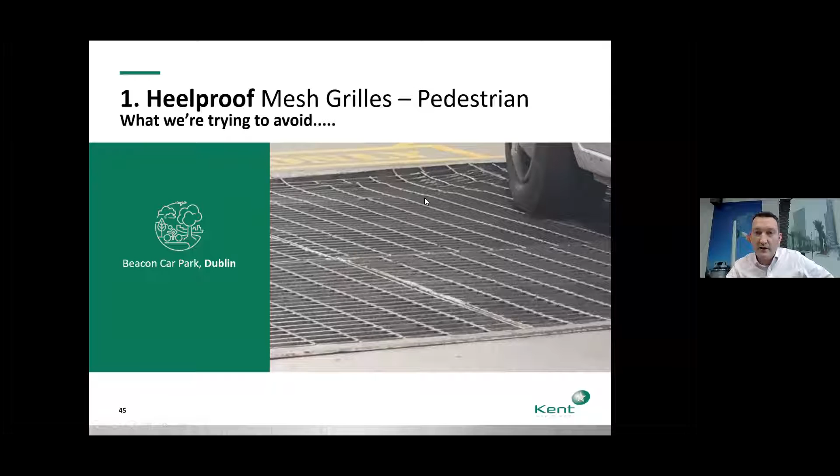It's a lot lower cost than the gratings we're going to describe to you now in a few minutes. But you can see here, the wheel of the car is probably churning up the gratings a bit, so as well as the downward force, you're getting that sideward force too. And look at the gaps here.

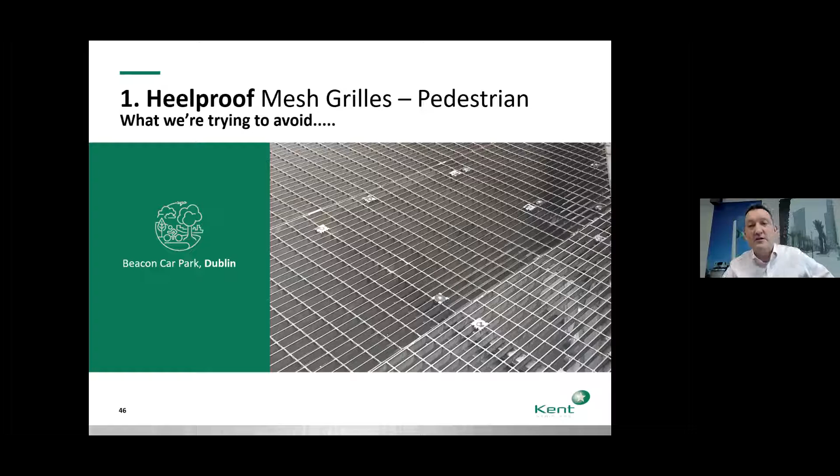Sinead, you mentioned to me the diameter of the heels she uses very often, but I certainly think her heels would go down through these. Even fairly flat, not so elaborate stiletto heels would go through these, a lot of heels will. And look at these ugly lockdown points on them. That's fine in an underground car park, but this was the standard strong grating used to ventilate underground chambers.

Now when we do these projects, some of the consulting engineers and architects end the meeting with, can you make sure you're in compliance with all the relevant standards to do with being heel proof? The truth is, they don't know this, but the standards aren't written very well. There's not really a standard written about heel proof compliance.

So we're going to show you an extract from the American Disability Act. What the Americans say is, when you have an opening on the street no greater than half an inch, that's 13 millimeters, it must not be more than 13 millimeters in one direction. And what they say then is that a heel-proof grate, one with openings of 1/4 to 5/16 of an inch, so 6 to 8 millimeters, can be considered American Disability Act compliant because the size of the opening is less than half an inch. So what they're really saying is 6 or 8 mil is below 13 mil.

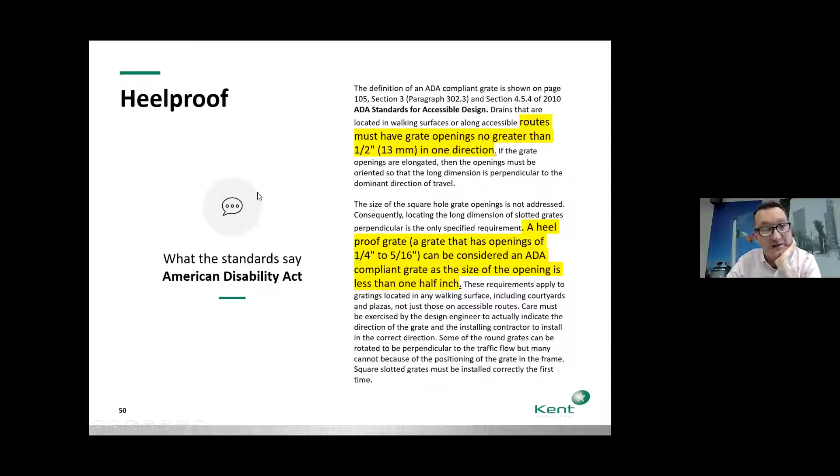And then in Europe we have the European norm EN 1433. What they say is when you have slots, for example we make slot drainage, when that slot opening on the road is from 8 to 18 millimeters - for example our slot drain gaps are about 10 millimeters opening on the street - when you have a slot drain below 18 millimeters opening, you don't have to break up that open slot, you can continue it for hundreds of meters if you want.

And what they say is if your gap is between 18 and 25 millimeters, you have to break it up every 170 mil. So if you think of where I grew up in Leixlip, in a housing estate you've got the footpaths from concrete and then you've got the road from tarmac.

On the tarmac road, there's those kind of curb drains, the little dish-shaped drains, and they'd have a gap of about 25 mil in the hinged cast iron covers. But you'll see the gaps on those would never extend more than 170 mil. So they're being in compliance with EN 1433. But you couldn't continue them for hundreds of meters with that big opening, okay?

So generally, what you take from that is heel-proof is between 6 and 10 millimeters. That's what us and our competitors in the industry would take to be heel-proof. We'd probably consider 6 to be high-heel proof and 10 or 12 to be heel-proof. So for high heel stilettos, we'd make them with a 6 millimeter opening.

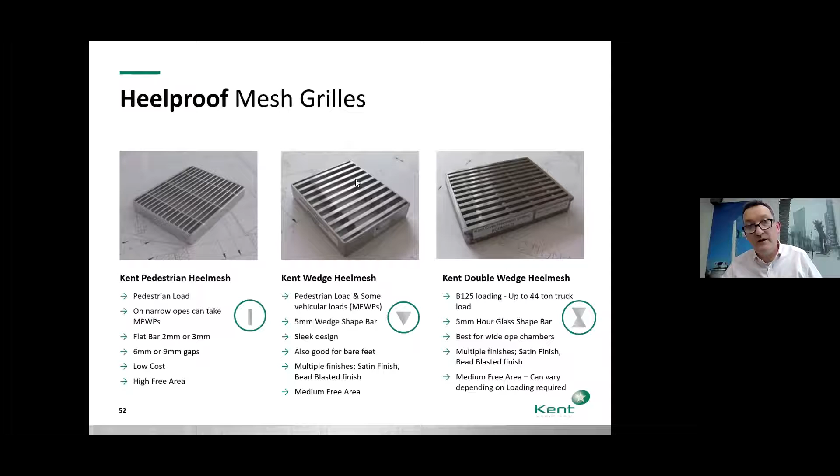So what we're trying to do is get these things to disappear. They almost disappear here, they almost disappear here, they're visible here - those are the load bearing bars.

Now, remember I showed you those ugly lockdown points on those wide electroforged gratings - there was a lot of space there to hide those lockdown points. I don't know why they didn't do it, but the industry standard is to do it like that, and it's a lower cost product. But when you got a prestigious project, we can hide the lockdown points in between the bars and keep an Allen head fixing inside in a cage so it won't fall out.

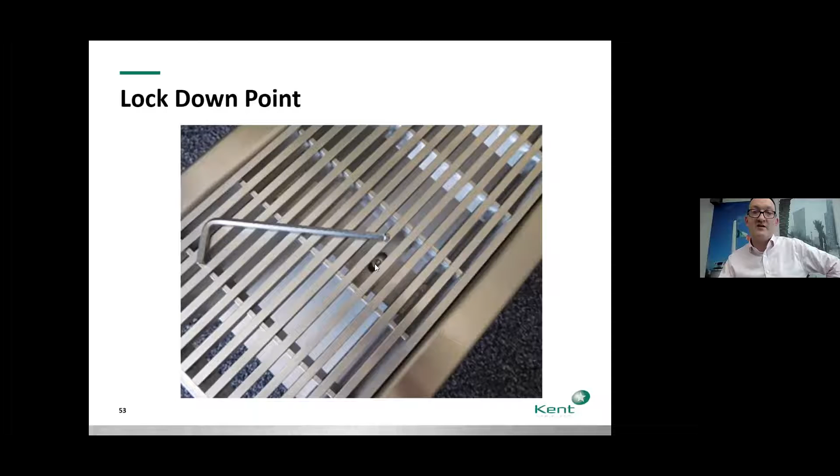So then you can have a run of drainage here - a 150 mil wide drainage, the pedestrian heel mesh, the lower cost one I showed you at the start - running along there with no visible lockdown points in it.

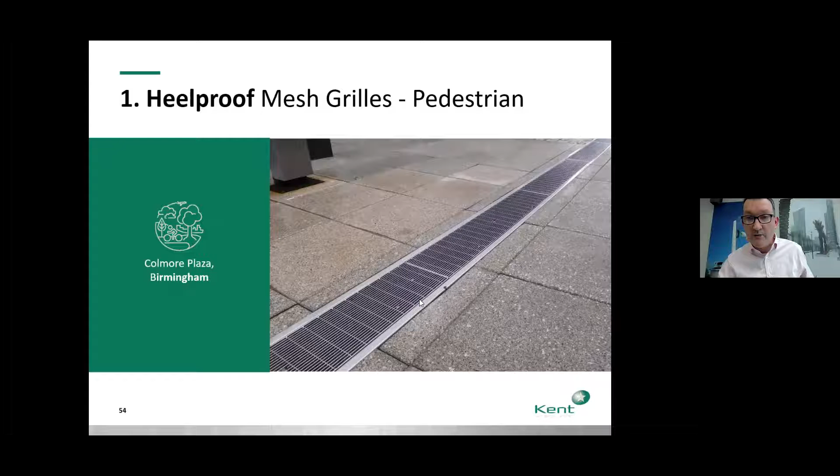So that's Colmore Plaza in Birmingham, heel proof, 6 mil gaps. And there it is in Dublin Airport T2 on the air bridge, taking you out from the airport to the car park. What's interesting now, once I've pointed this out to you, you'll start noticing these when you use the airport.

But then when you go to T1 and look at what was done all those years ago, it's quite ugly - you probably would have never noticed it before, but I suppose Dublin Airport T2 was a gilt-edged project at the time, quite a fine project when it was being designed. So this is fine here on a 250 mil wide area restricted to pedestrian activity.

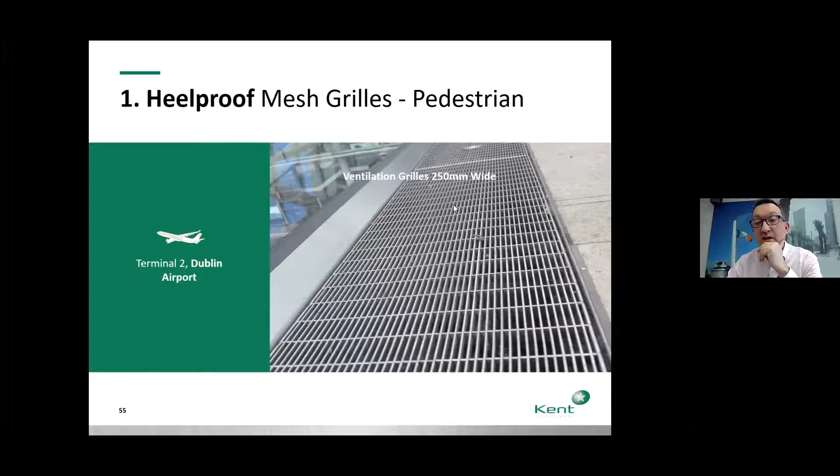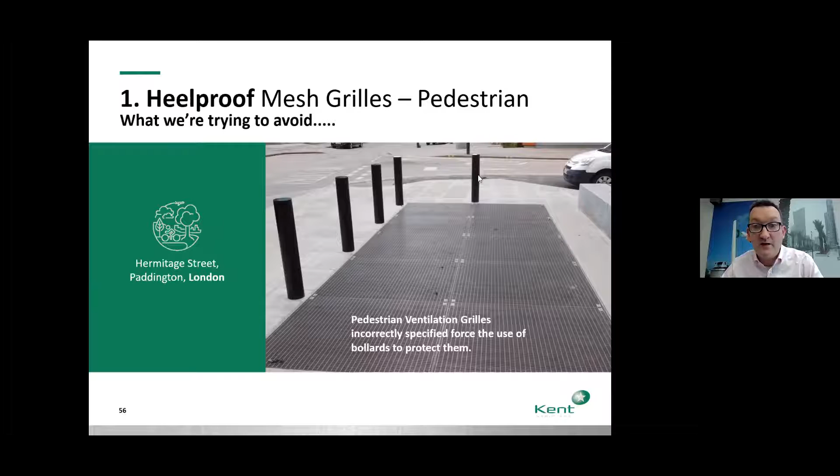So bollards should really be around the perimeter of the footpath if you need them to stop them getting up on the footpath. But visually a lot of landscape architects would not like to see that. So that's what we're trying to avoid.

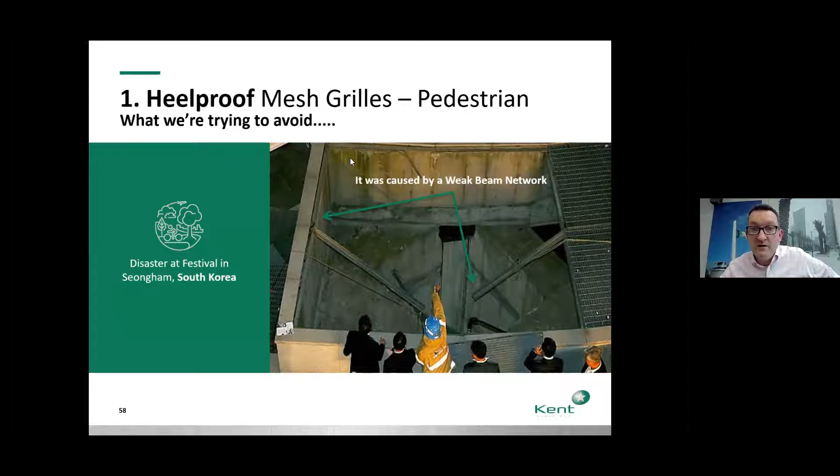So now what happened? Well, first of all, you can see there's a weak beam network here. There's a beam going from left to right here, but there's no evidence of beam pockets there. There should be a lattice of beams along here, where you might have a whole series of grills, maybe 1 meter by 1 meter, all supported by beams with one majorly strong beam going across from left to right, then a series of smaller beams going from top to bottom.

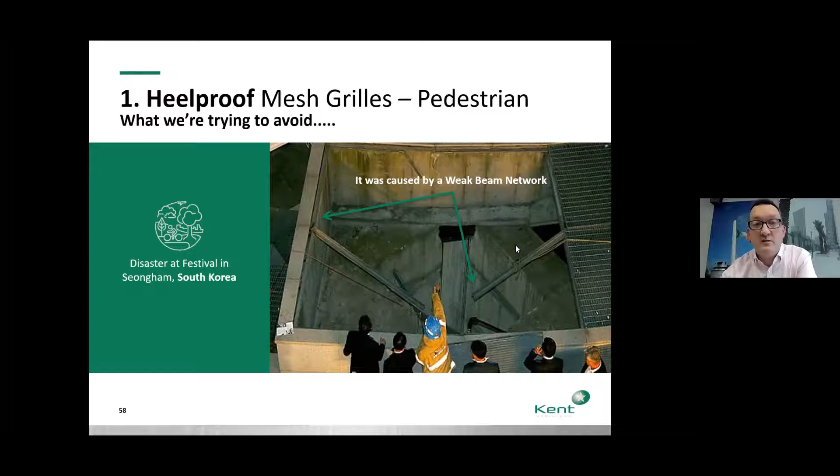Now why did it happen? Also because nothing can drive here. It's a raised area, but not raised high enough to prevent people climbing on it. This is like a plaza area, and there was a concert going on here, so there was entertainment in the plaza. There was about 30 kids up here jumping up and down, a concentrated pedestrian load. No vehicle got on here, but the pedestrians were up there, jumping up and down, messing as teenagers would do with music. And that's it. They fell through the structure down through the shaft, and 16 were killed.

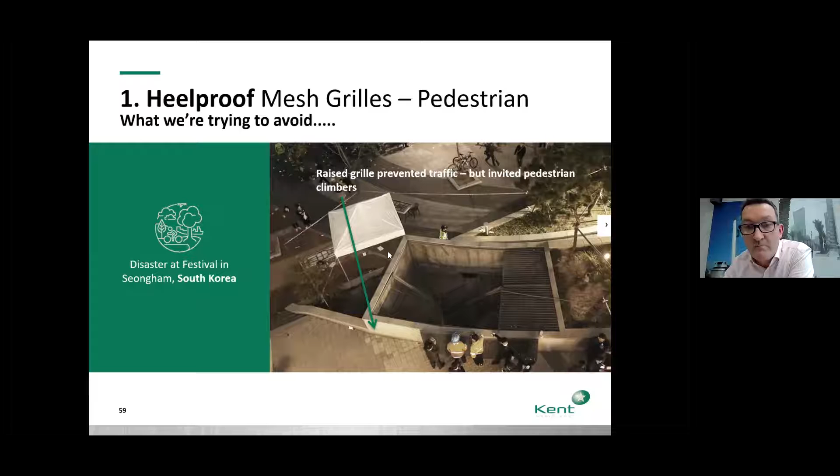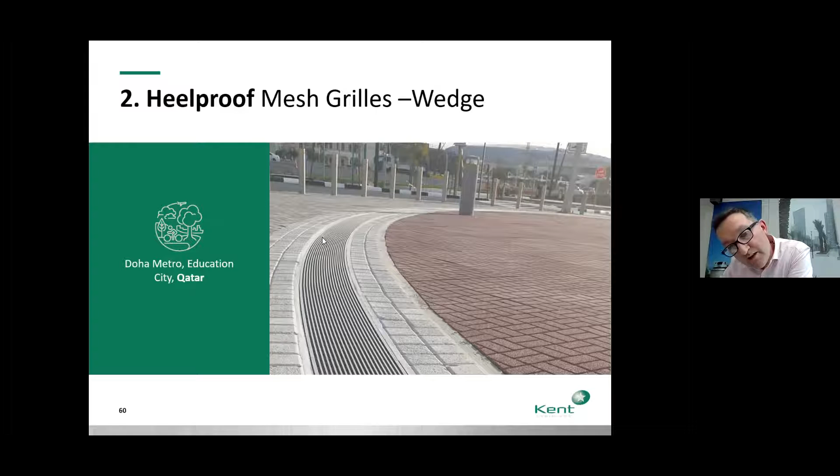We actually did all the bollards around this project as well. It's one of the railway stations on the Metro of Doha. So there it is, that wedge wire - aesthetically it's probably the best we have, but it's only good for those 150 mil wide openings. There it is again around another Metro station. You can kind of just about see the load bearing bars going across there, but they do tend to disappear.

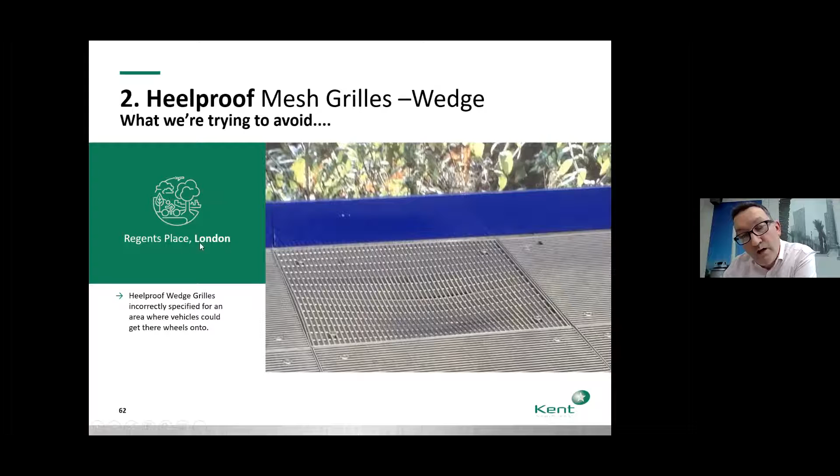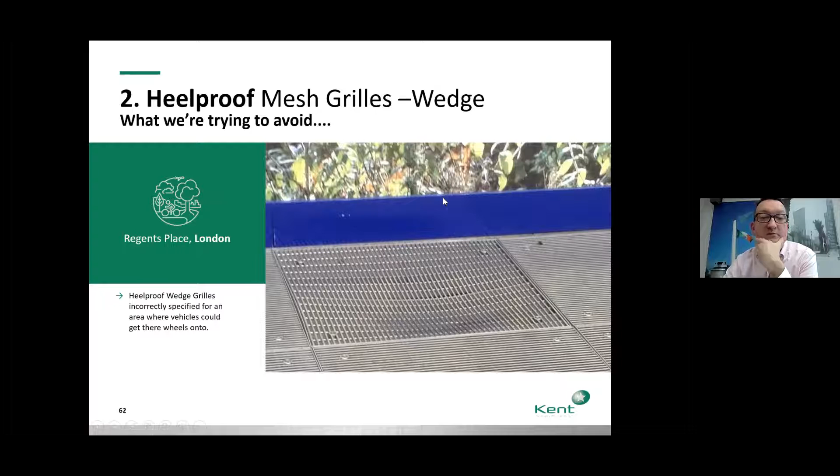And then that wedge wire structure, when it's put in the wrong place - this is an error, as you can tell by the lockdown points, we don't do lockdown points like that - we were invited over to a project where things had gone wrong in Regent's Place in London, and we could see areas there. The grilles were buckling, and we looked at it and just said the wrong product was in the wrong place here. Fine for pure pedestrian activity, but occasionally there'll be somebody dealing with those plants and putting equipment on these grills.

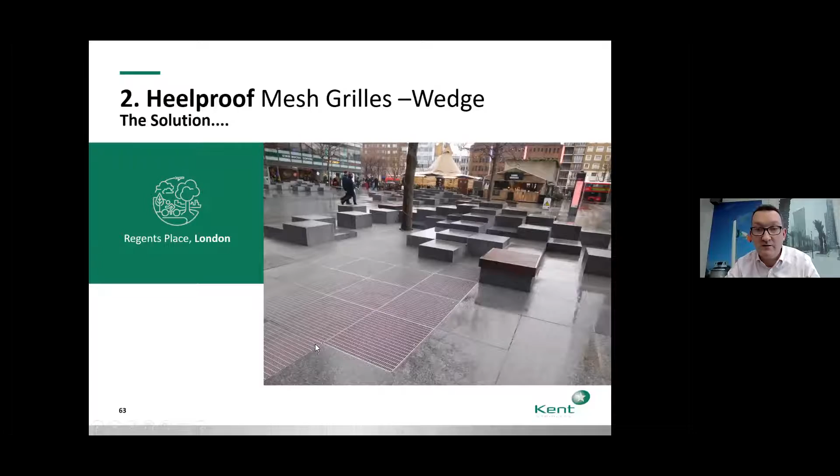But a whole series of, I think there are 800 by 800 grills, supported by a beam network. There's an underground car park below here. And then kind of a nice seated area here, granite stone. This is actually nicknamed the Giant's Causeway, mimicking the Giant's Causeway up in Antrim. So that's down at the bottom of Regent's Place. There's a tower just there where the Starbucks and Pret a Manger is.

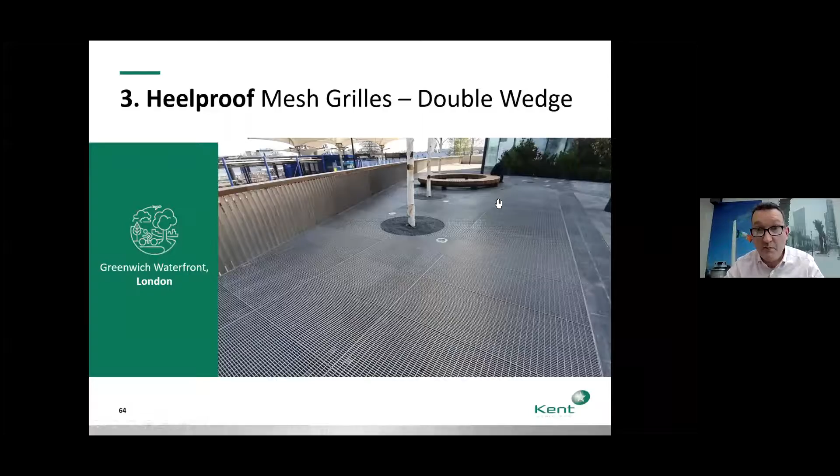Okay, look at this opening here, a massive opening, we're looking at 30 meters by 8 meters or something like that. We've got a lattice of beams underneath this, and there's an underground car park underneath that as well.

All heel-proof, big area, but that can take traffic loading as well. Now look, our business also makes tree grills and balustrade, that's all our balustrade timber top. That seat structure is ours as well. We do all this kind of stuff, but today we're just talking about this section on grills.

Now, how do we make them stronger? For those grills, that double wedge structure I showed you has that double triangular structure running left to right. But we can increase the strength by the load bearing bars running top to bottom here. You can see them here, they're at about 50 millimeter centers. We can bring them into 20 or 25 millimeter centers, so we can double the number of them.

We can also increase the thickness of them, going from 5 to 8 to 10 mil thick. One of the things with these inquiries is an architect or engineer tells us they've got an underground chamber they're trying to ventilate, and they need a certain airflow, which means a certain free area. As you increase the number of bars and the thickness of bars, you're diminishing your free area.

If you imagine a 5 mil bar with a 5 mil gap, you've got 50% free area minus the space taken up by the load bearing bars. In a lot of cases, on a large structure you might have around 42% free area. But by making the bars thicker and putting more of them in, you'll bring your free area down below 40%, to maybe 37 or 38%.

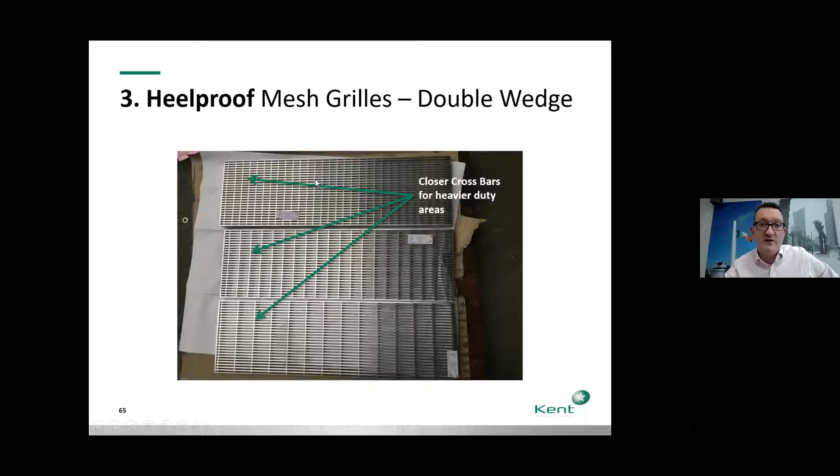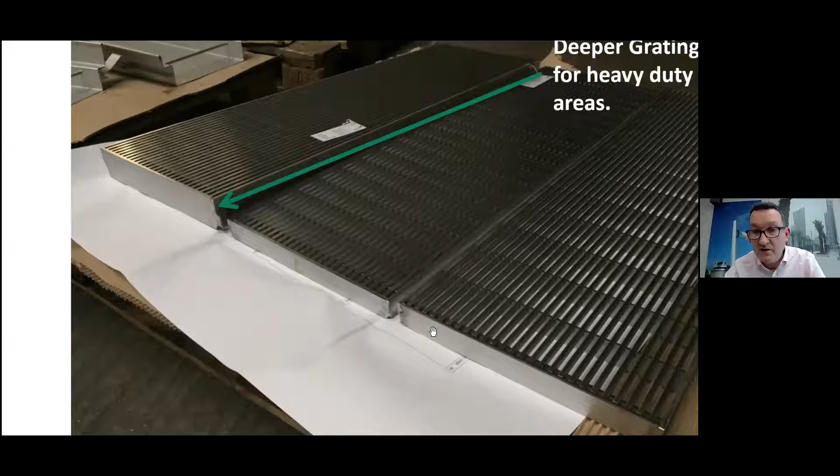Another way of dealing with that, instead of increasing the number and thickness of bars, is to increase the depth of the bars. These are 25 and 30 mil deep, these are 50 mil deep, and we've made these 100 mil deep. Once we make the bars deeper, we don't have to go as thick or put as many in.

So if you've got a project where you're at 50% free area and trying not to diminish that too much below 45%, the way we do it is deepen the bars, giving you a deeper grill. You've got to be able to deal with that with your angle frame all around supporting it, but we're strengthening it without impinging on the free area or reducing the airflow through it.

When you do it right, you can get all the wheels of a heavy goods vehicle on the whole central span of grills. There's a run of grills about 16 meters long by about 4 meters wide, with a beam network going across there.

That's around the corner from the Giant's Causeway, on a road leading up there. I'm going to show you what that looks like today. This year they're keeping the grills in place but doing up the area right beside it. That's what it looks like now - that truck was going over these grills a few minutes ago.

Now they've installed these, which we also manufacture as part of a presentation. These are Corten steel structures with illuminations in them and perforations in the side, they light up at night. Corten steel clad in Cumaru timber with oil. That's the same street.

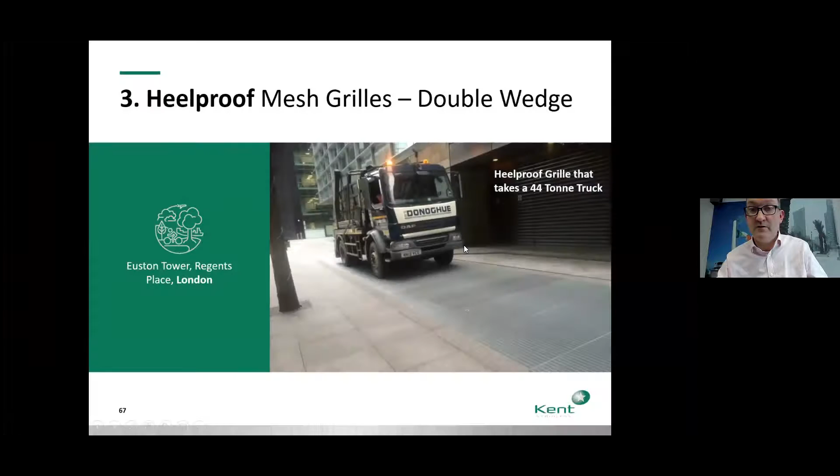We did this 11 years ago, now we've done this one this year. The Giant's Causeway part I told you about is just there - you see where the guy's standing, it's that area just down there behind that glass area.

If the project allows it, if you've got the money in the job and it's a prestigious job and you want it to look fancy, we can play around with the load-bearing bars and the crossbars to create something like a chessboard effect or some kind of pattern. That's kind of nice. That's at the bottom of a project called Shell Tower.

The petroleum people, I think, is it? It's Shell, yeah, the company. Shell Tower in South Bank Place in London.

Okay, and that'll take the wheels of a 44-ton truck on that, as well as save your high heels.

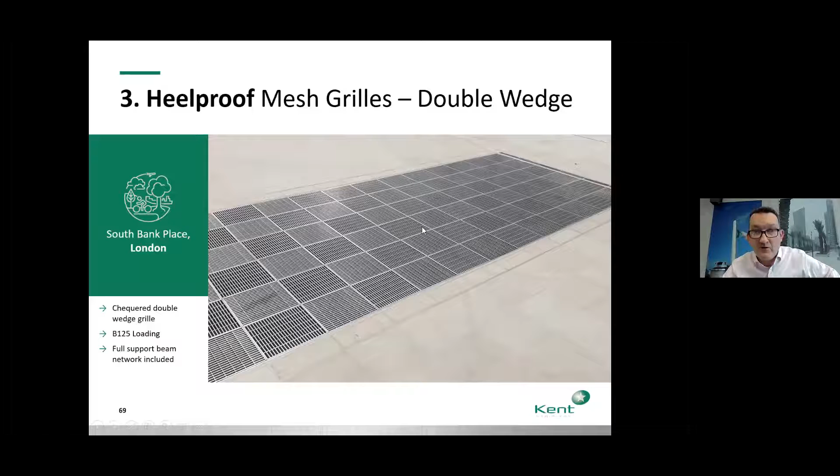Actually, one of the reasons they wanted that crisscross pattern - I forgot to say this, it's a good point - was that if you have the opening of a building here, and you ran all your transverse bars this way, then a wheelchair entering it would have its wheels turn on the bars going all one way. So that's one of the things that got them thinking about this, that you should install your transverse bars perpendicular to the direction of traffic, so that wheelchair wheels cross them in a perpendicular fashion. This was also done for aesthetics, but that's one of the things they wanted to tackle here.

Right, the same kind of structure, double wedge, we do it then on this narrow span, but we do this because every now and then you might get wheels across. This is a fountain area. We make fountains - we're not a fountain company, but we make the stainless steel elements of fountains for a couple of fountain companies in Britain.

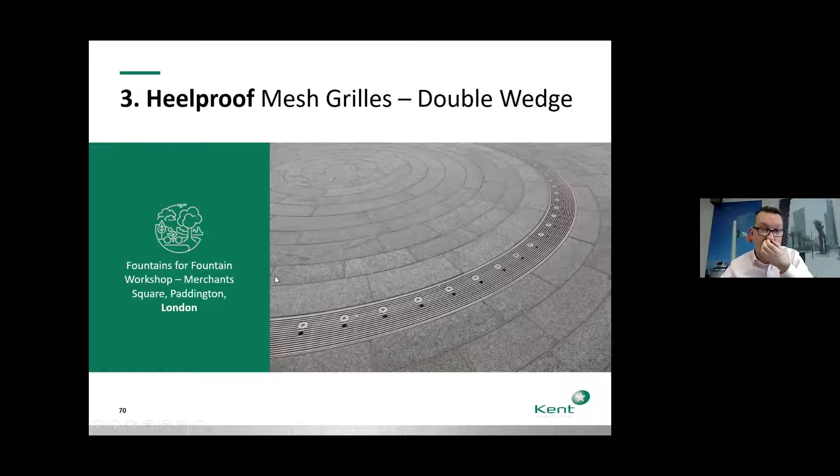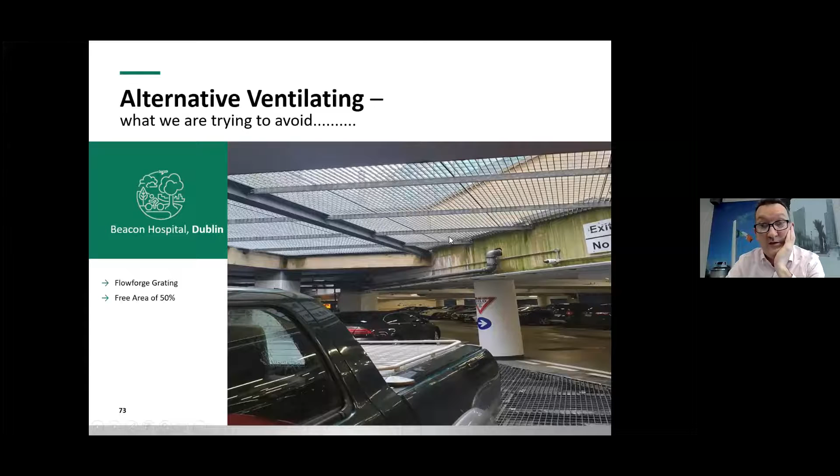Well, the heel-proof grills will stop the cigarettes going down, but they might get wedged in it. But sometimes if you're concerned about that, and you don't want open gratings and you don't want the heel-proof gratings, because dust and little grit can fall down, and even rain - if you didn't want rain getting down, sometimes you might want to move to vertical ventilation instead of horizontal ventilation.

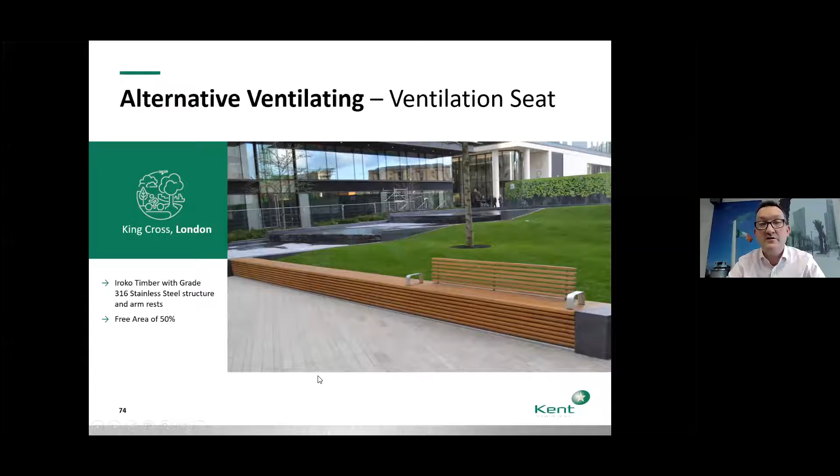So if you had that problem you were trying to address, and had the free area you're trying to ventilate, what we do is build the ventilation into the vertical wall of a structure. In this case, it's a seat. These seats can hinge open, and can contain cavities that hold things like umbrellas or seats.

So there's a ventilated seat we made in King's Cross. It's really just taking the ventilation opening, turning it vertical instead of horizontal, and then disguising it through these louvers that then look like a seat.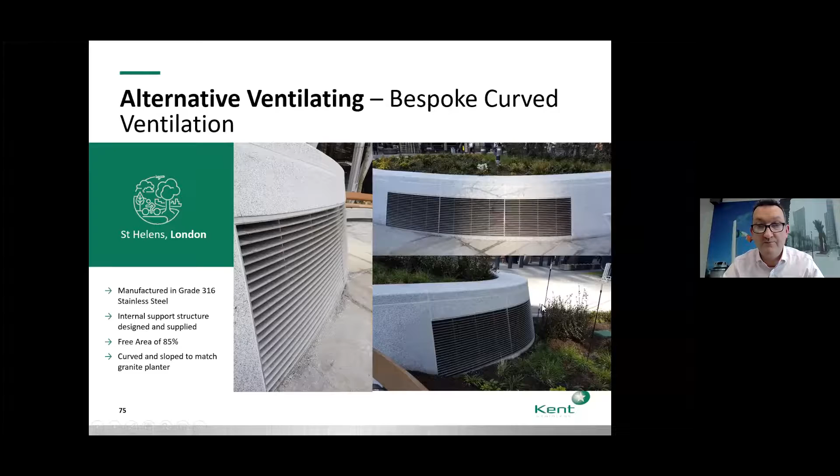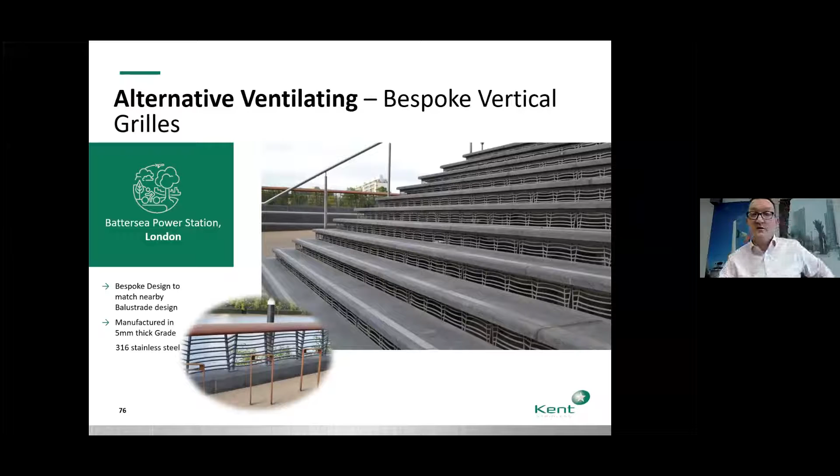That's at St. Helens. And there's vertical ventilation built into the vertical wall of these steps - that's at Battersea power station. It's a kind of strange little pattern built in there, quite high free area, but the pattern is there because, if you look, we didn't do the balustrade nearby, but somebody else did, and they wanted this theme to continue across in the design.

For us it's just a laser-cut pattern - could be squares or circles or whatever. In this case, it's patterns that match the balustrade. There's the balustrade that's nearby.

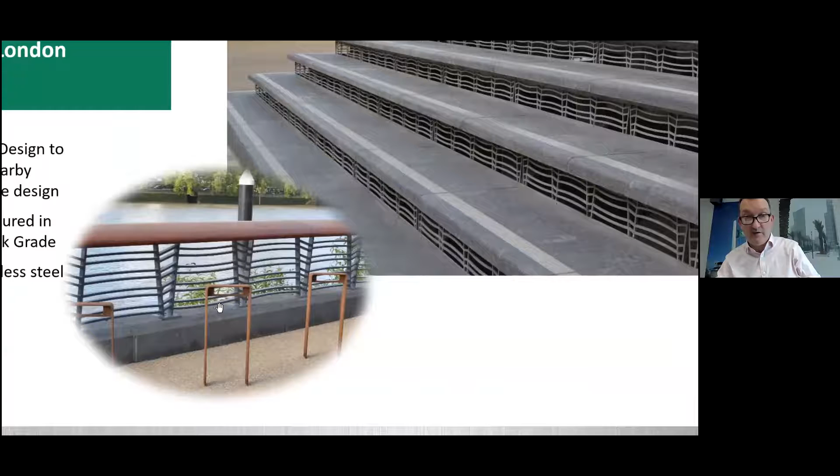We actually did make these Corten steel bike racks as well. And these are ventilated bollards - this was designed for Qatar, where there's a lot of manhole chambers below ground, and in the heat there's a lot of contraction and expansion of the air and gas below in the chambers.

So they want to ventilate some manhole chambers, but they want to keep those chambers watertight yet ventilated. So how that's done is you've got some ventilation points here, but we can keep it watertight by running a secondary tube that's not ventilated.

So let's say this is a 10-inch tube. We've got a 4-inch tube rising up above the top perforation here, and then the airflow comes through the chamber, up through the central tube, the 4-inch tube, out over the top of the 4-inch tube, and then out through the perforations in the 10-inch tube. So it's coming up in that fashion. It creates a ventilated structure that's still watertight.

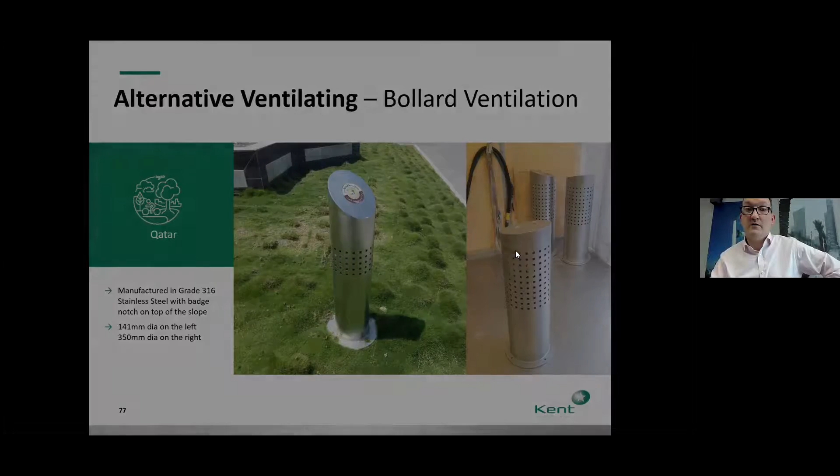Now, I was going to go on and talk about finishes here. I don't think we will, because we spent quite a bit of time talking about the grills. We might just leave it there. Sinead, what do you think? I think I probably took half an hour there where we thought we might be 20, 25 minutes. So I might just finish it up there. I think that'll make more sense, and we'll see if there's any questions and answers. Sinead, does that sound okay? Yeah, that's fine. I mean, we do still have a few more minutes. We could go on for another 10, 15 if you wanted. Well, if my voice takes it, I think it might be quite interesting.

Right, okay, so that's ventilation grills. I told you there's 8 sections in this presentation we give. Another section a lot of people ask us about is stainless steel finishes.

So what happens? Well, first of all, I have a few new slides in here, we'll just deal with them first. What's stainless steel? Stainless steel is typically made up of iron, carbon, chromium, and nickel, and typically the chromium is about 18%, though not always. Now, a lot of people know of a couple of grades of stainless steel, but there's about 200 grades of stainless steel.

Your knives and forks at home are made out of stainless steel. Your sink might be made out of stainless steel. The catalytic converter in your car, or the exhaust, is made out of stainless steel anyway. The 200 grades are split into 4 families: duplex, ferritic, martensitic, and austenitic. The ones we typically use are austenitic; occasionally we use a duplex, but austenitic is typically what we use. Across the world, 70% of stainless used is austenitic.

And then the majority of that 70% is grade 304. You might hear this mentioned, 304 and 316 stainless steel. If you add molybdenum - hard to pronounce, I used to call it molybdenum but it's molybdenum - if you add molybdenum to grade 304 stainless steel, you get grade 316 stainless steel. It adds about 20% to the cost of a finished product, but it increases your corrosion resistance.

So why would you want to increase your corrosion resistance? Because if you're working in a pharmaceutical factory, you might have some highly corrosive chemicals. If you work in a Coca-Cola factory, the sugar concentrate is very corrosive on stainless steel. If you are doing things on the streets in London, in the winter, they're terrified of people slipping, so what do they do? They put down salt on the streets, and salt is corrosive against stainless steel. So all of those things would make you move from grade 304 stainless up to grade 316 stainless steel.

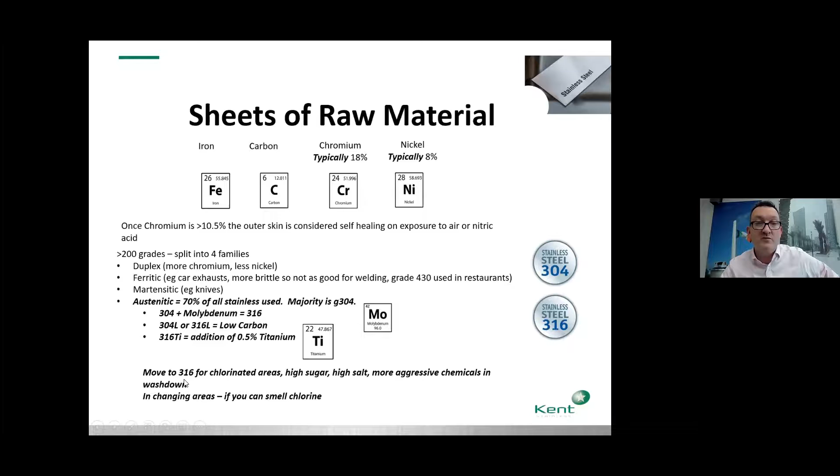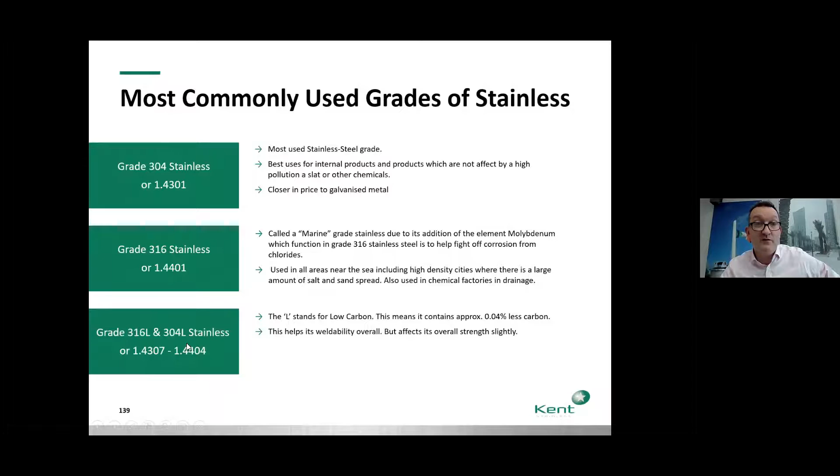I think I've already said this, so I'll skip on. 304 and 316 are very typical terms we use, but they're really the American terms. The European terms are these.

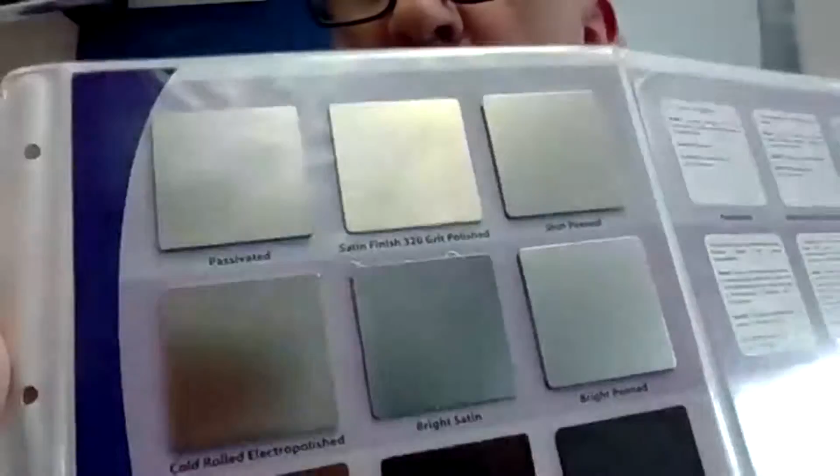So you should be able to see grain going from side to side here on this piece here, okay? And that's done by, like, we buy in these belts of polishing belts, like the 3M company makes them.

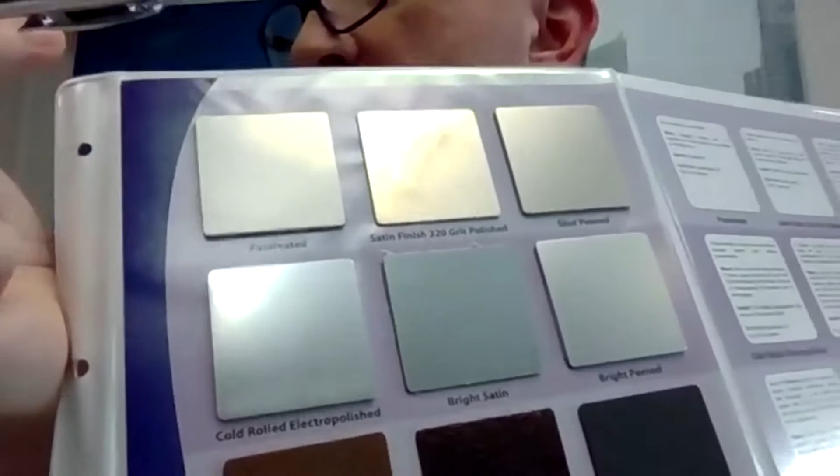It's like sanding your wood at home. You might start with a rough grit and finish off with a fine grit. The same thing happens with stainless steel. You start with a rough grit and finish with a fine grit.

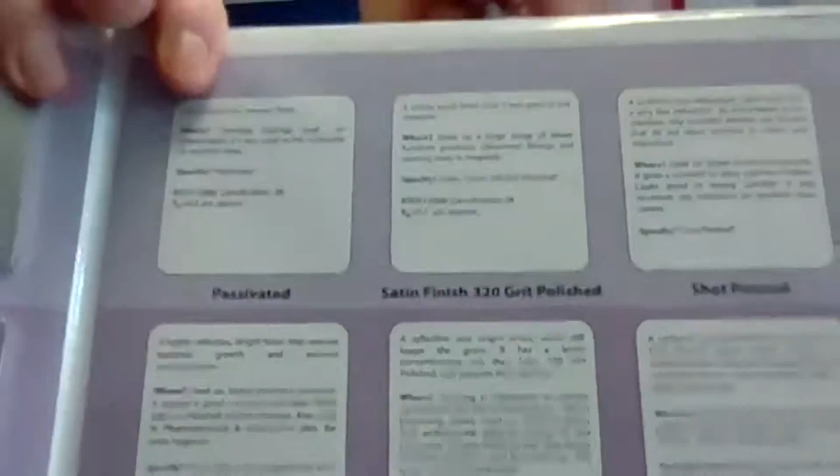Our standard grit is 320 grit. Okay, and if we use 320 grit, let's see, does this... I don't know if that's readable or not, Brendan, is it? No. Okay. No, I don't know if that helps the camera focus or not.

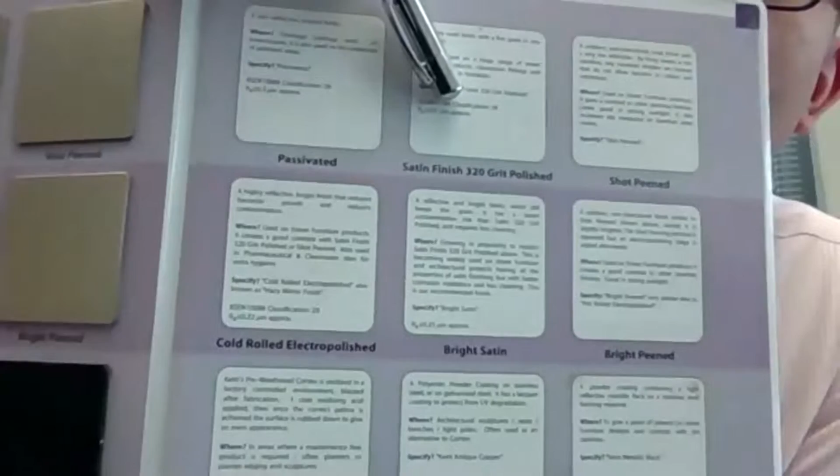But anyway, 0.5 RA is what you're trying to achieve - 0.5 roughness average. Okay, and if you do that, you're in compliance with the European norm 10088 for architectural stainless. So you want a 0.5 RA.

And that means if you zoom in on that polish, you'll see peaks and troughs, mountains and valleys, and you want them to be as smooth as possible. You want the grain to make it pleasing looking. But you want that to be as smooth as possible, and you should be in compliance with EN 10088. You should have a grit.

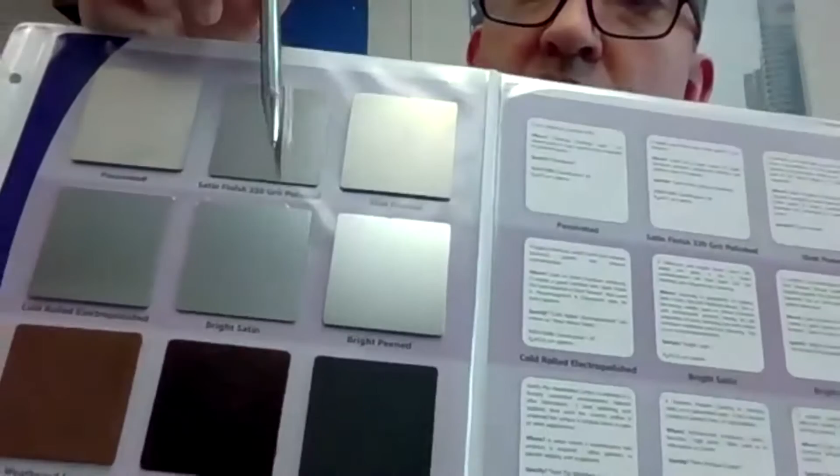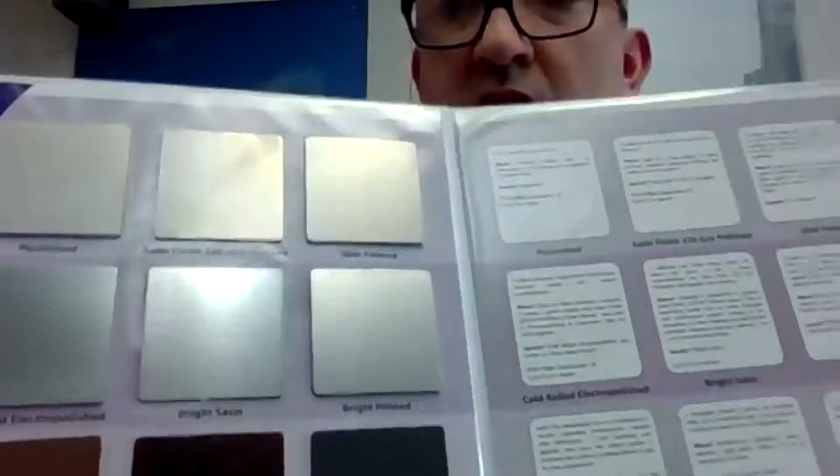So if an architect wrote down polished stainless, that's not good enough. You need to get your grade of stainless right, but more importantly than your grade of stainless is your polish of stainless. Okay, so you can have grade 316 stainless, and you could polish it badly, and then you're going to have problems. I'll show you pictures of those in a second.

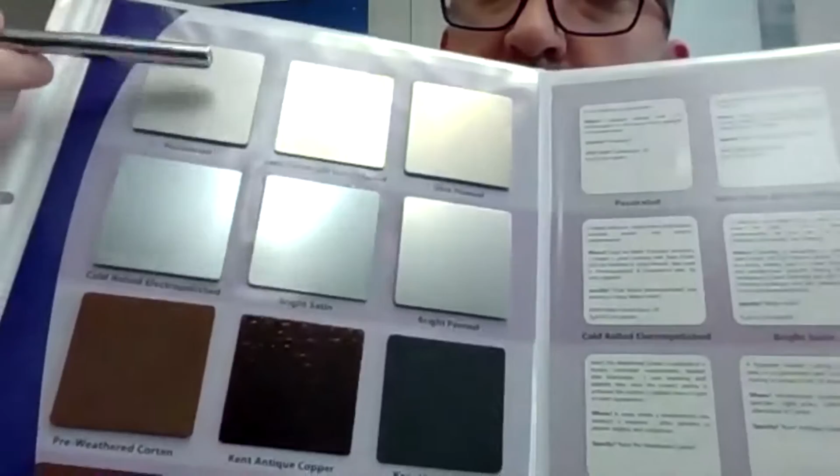And then you can see the pen being reflected here. When we buy in the stainless, well, it looks like this. When we put it in an electropolishing tank, it gives it that kind of hazy mirror finish, okay? So no grain, but you kind of get a reflection of it. And that's great for pharmaceutical projects and that, okay?

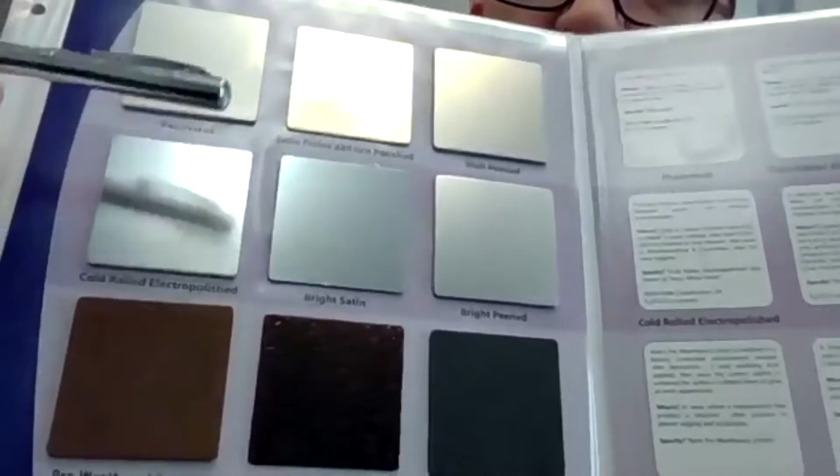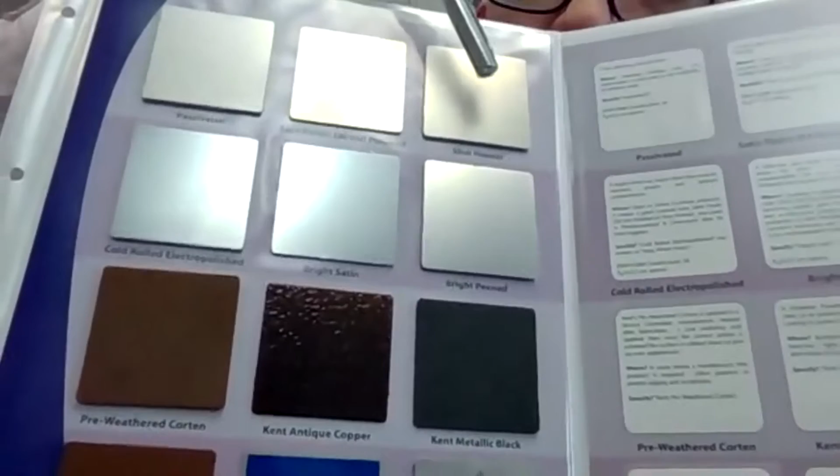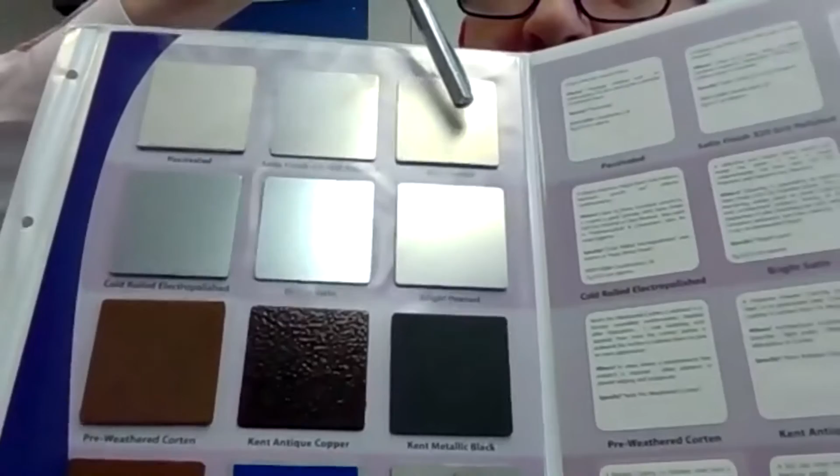But if you look over here, you just see a shadow of the pen and not a reflection. Reflection here, shadow here. We've bead blasted the stainless here. So we've fired beads, tiny beads - I can't remember the micrometer diameter of them - and you fire them at the stainless steel, and you give it that kind of mottled finish.

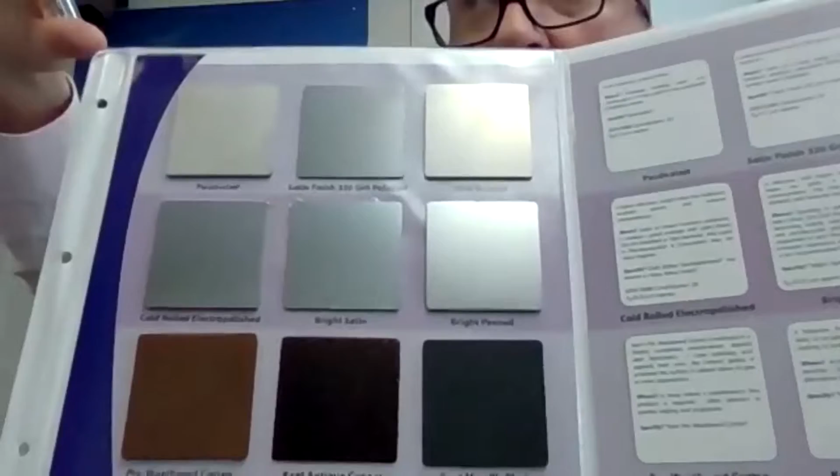And that's good if you had like a planter or a seat and you had a few panels of stainless and they weren't all lined up with each other. Some were going across, some were going up at an angle. Then you might want that grain going across and up at an angle. You could bead blast the whole thing and it'll have a uniform finish.

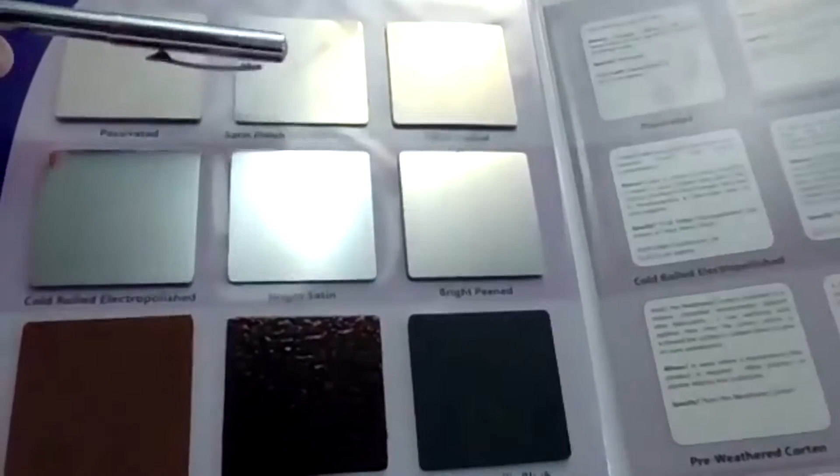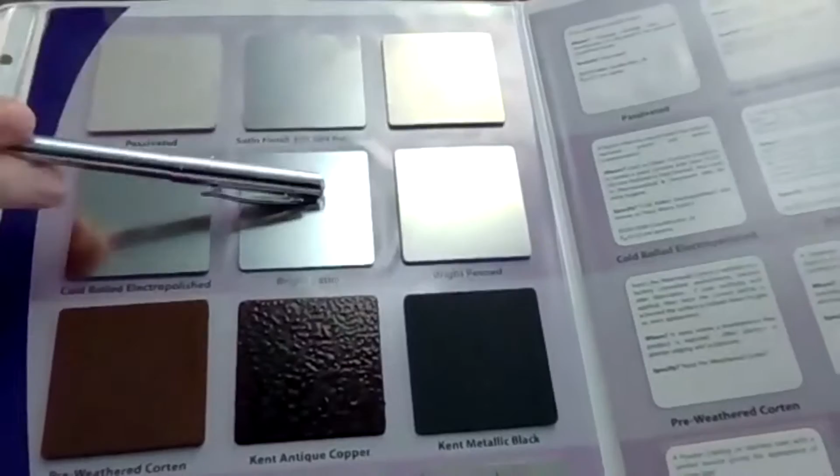And what we like to do is get people to accept it - take the satin finish and then dip it into an electropolishing tank, which removes a slight skin from the stainless steel, much more hygienic and helps the life of the stainless steel. So now we're exceeding the requirements of that European norm, okay? We're going from an RA of 0.5 to about 0.25 approximately, okay?

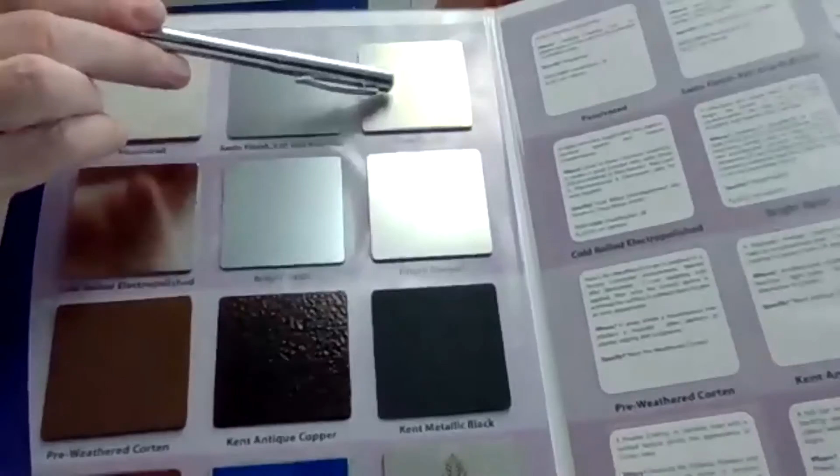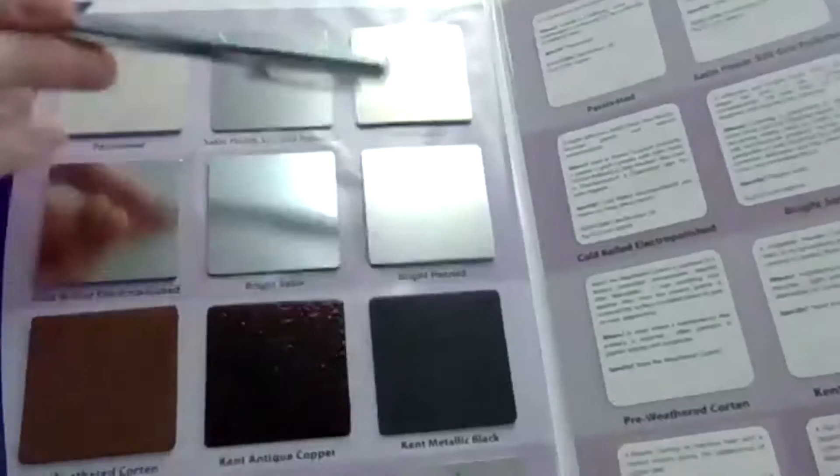And with that bead blast - now bead blast isn't really good for stainless steel, okay? But you can hear how rough it is there, okay? But if you electropolish that bead blast, it helps the life of it. It stops the tarnishing, or it helps stop attracting contaminants.

A few more finishes here. That's 304 stainless steel, powder coated with a kind of metallic black finish. Corten is very popular - there's a piece of Corten steel. It's not stainless, but this is stainless steel coated to make it look like Corten steel.

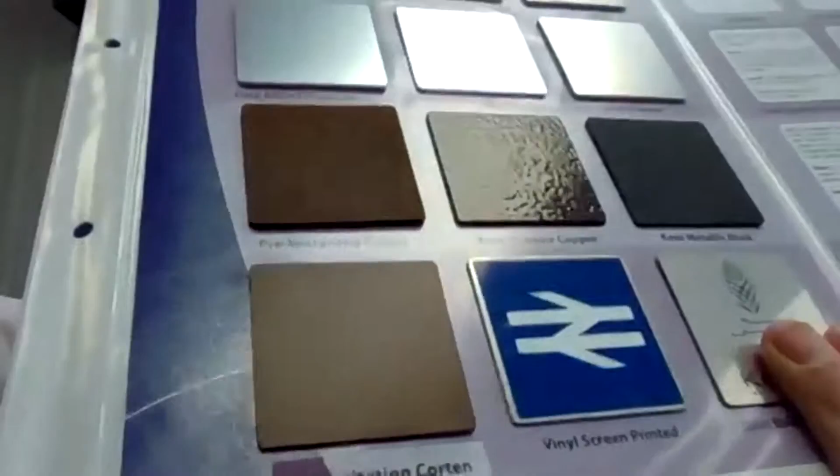Okay, so this is better than if I hand these things around in your office, but okay. Right, now let's share again.

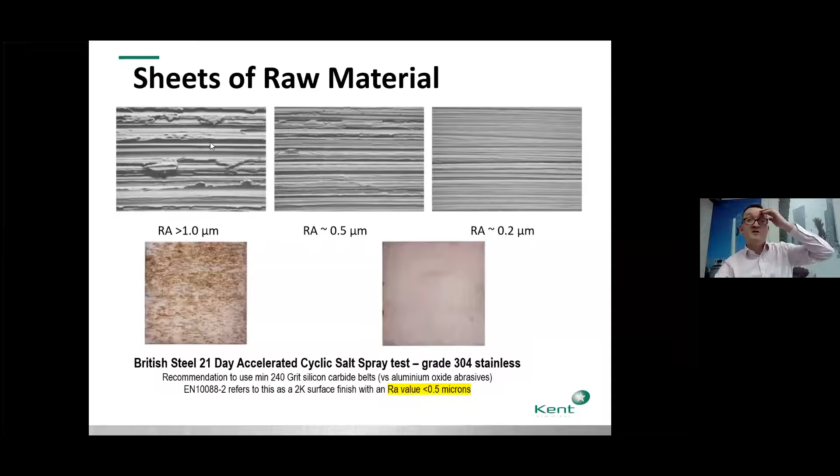Okay, so when you get your microscope and look at that kind of polished finish, an unscrupulous company may polish it and it's going to look fine when it's delivered to site. When you take a microscope to it, it's going to look like this. Now, so what? Do you care if it looks like this, or this, or this?

Remember I showed you electropolishing brings the RA down to about 0.2. It's smoothing out those peaks and troughs, those hills and valleys. 0.5 is what you need to be compliant with the European norm, okay? An RA value, a roughness average value of less than 0.5 microns, in compliance with EN 10088.

This is kind of a test that the British Stainless Steel Association has done, like firing salt water at it for 21 days. Here's what happens to this, and here's what happens to something in between these two.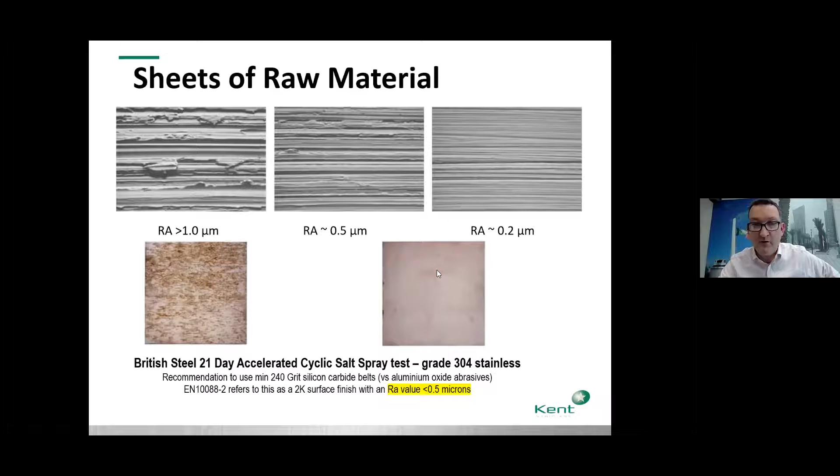When we weld the stainless steel, we can leave it untreated, which we never do. We submerge it in a pickle and passivation tank, which restores the skin of the stainless steel. But some people, if you open up a cabinet or something, they may not passivate their welds. They should passivate their welds. They can brush them, they can grind them, but pickle passivate is what should be done.

This again is that when you spray the salt on it for 21 days, it looks like this.

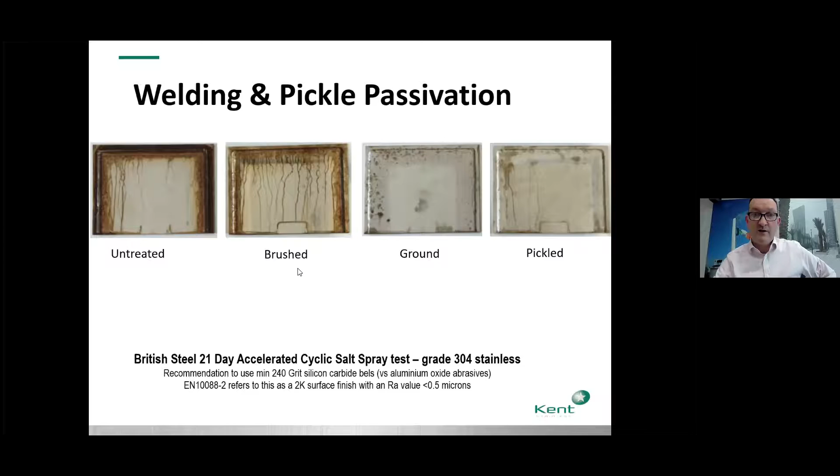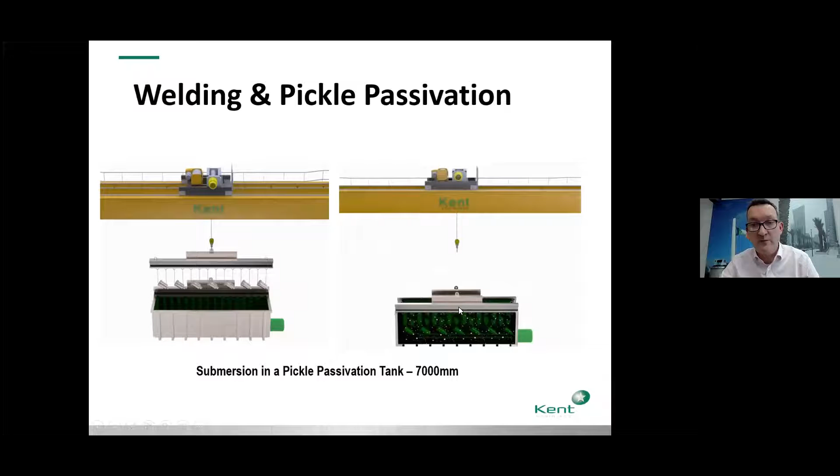So what we do in our factory is we've got an overhead crane, and it drops, for example, here's 7 or 8 drains for a pharmaceutical factory being submerged in pickle and passivation acid. We've got a 7-meter long tank. Submerge them in there and you'll passivate all the welds and restore that protective layer that's on the outside of the stainless steel.

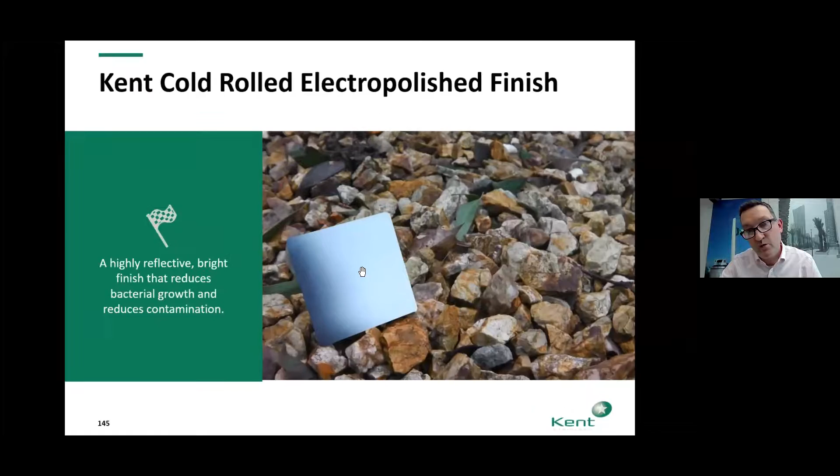So there's a close-up of that 320 grit polish grain going one direction. Here's a close-up of the same thing that's been dipped in the electropolishing tank. You see a slight bit of extra reflection on it. And there's the kind of hazy mirror finish that we like to use in super hygienic applications.

So what can go wrong is if you don't polish it properly. This guy delivered these the same year that we delivered these. He won the job because he was lower cost than us, so we didn't get any of the bollards there. Well, we got some actually—you'll notice them because we have them mechanically fixed down just to match these balustrades and trolley bays. But somebody else then won a few other lower cost projects.

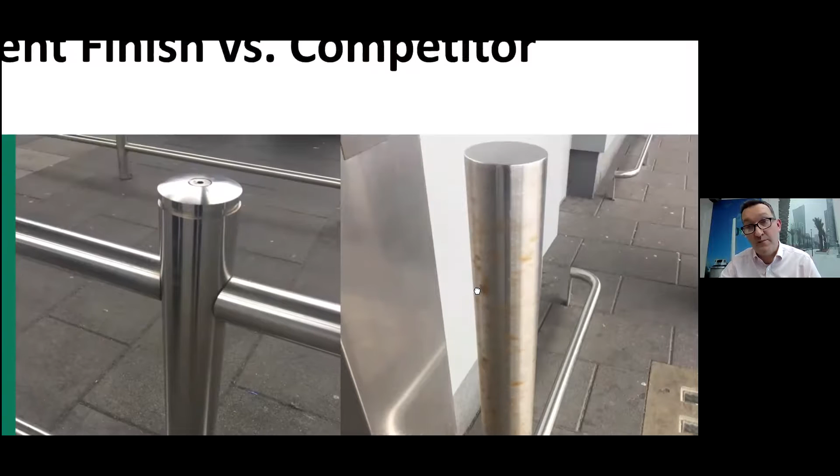That's what happens—you can even see the roughness of the polish on that stainless steel there. He complied with what he was asked for; he delivered polished stainless steel. But what he should have done was have satin finished 320 grit polish in compliance with EN 10088. That's the way the specification clause should be written.

There's a close-up of the box section support. Now, I actually think it might be—I don't know if that's the company that made it or not, it seems to be made in Germany, but okay—they didn't polish it well, and that's tarnishing. It's really easy to avoid this; it doesn't cost much, but you just got to enforce the specification at the start. And there's a close-up of the round tube, okay? All the same.

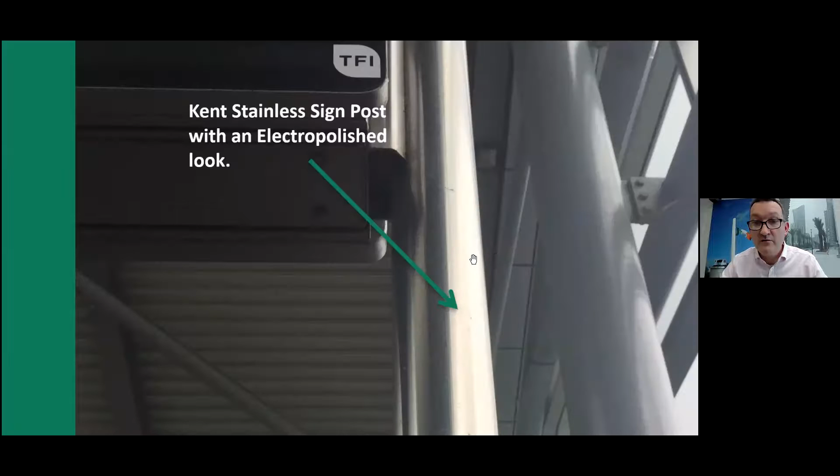The Irish contractor gave that out to a British company. I thought it was awful. We lose jobs, we lose jobs. So that's fine, we were happy with this one. This balustrade was worth €1 million to us. The canopy was worth about €1 million as well, and we lost it. We would have been more respectful if they'd given it to another Irish company. But anyway, you can see how close these are to each other.

Here's a close up of the canopy. That's tarnishing away there. There's nothing really wrong with it, it's just aesthetically not looking that good. But it should be looking perfect. It should be looking like this, and it can do if you do it right.

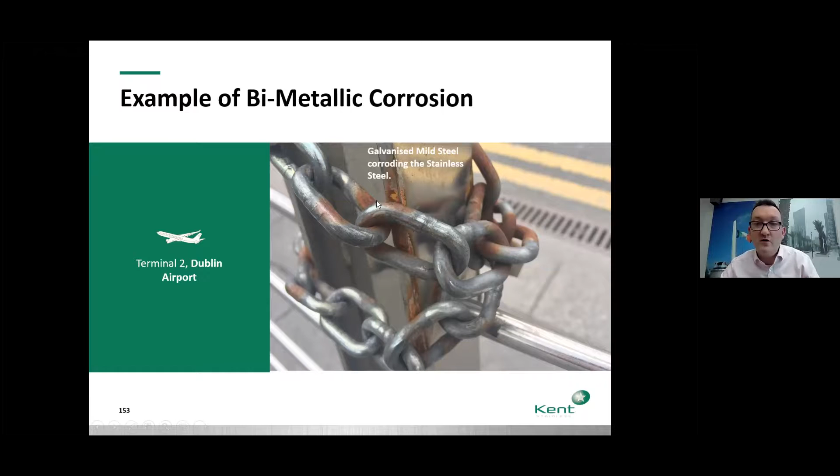Just to show you, we're not just showing you what other people do wrong. Here is our product, our balustrade, with a gate on it. The maintenance people at the airport are using a galvanized steel chain to lock the gate. This is a case of bimetallic corrosion, where you've got two dissimilar metals in contact with each other. It's very easily avoidable - most chains, if you have motorbikes or even bikes, will have a plastic wrap around them that stops that happening. But in this case, it's touching, and the rain helps accelerate it, creating that corroding effect between the galvanized steel and the stainless steel.

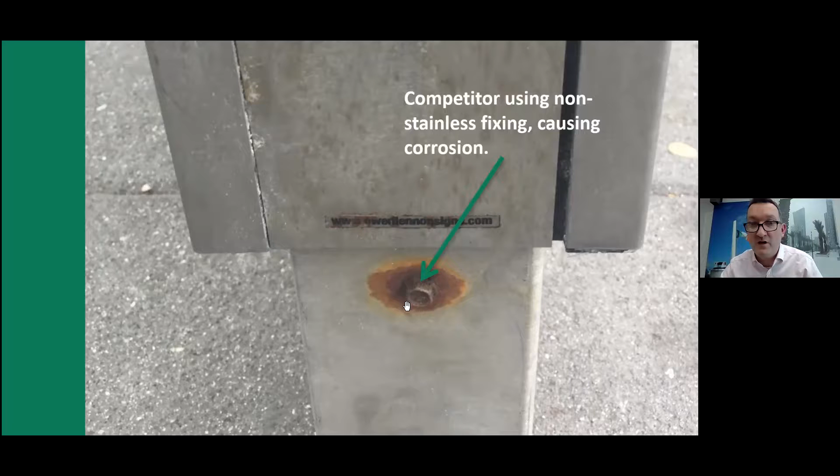Here's another wayfinding structure in Dublin Airport T2. Some of you can see this when you walk around the airport - they've got a stainless steel wayfinding totem or lectern, and they've used zinc fixings to fix it. It's a real pity because they saved themselves 50 pence or so. You've got galvanized steel, zinc, touching stainless steel, and that's going to keep on corroding and growing over time. We didn't even know about this job, we didn't tender for it, but to see somebody do that on a prestigious project, saving themselves 50 pence on each structure, it's a shame.

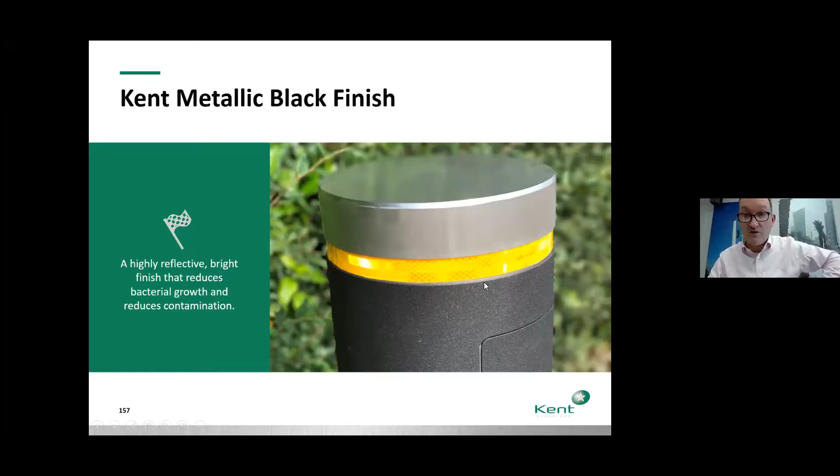We showed you some examples of 304 stainless powder coated products. Here's a nice one called metallic black, it has a texture in it. It looks like that, and when you shine the light on it - some architects like that you don't see the fleck in it until the sun shines on it a certain way. There it is on some power bollards: metallic black body, 304 stainless steel with a machined cap, 304 stainless steel, and a reflector strip on it.

These are used to make sleeves for anti-terrorist bollards. These will stop a 7.5 ton truck traveling at 40 miles an hour - if it crashes into that, the truck will stop dead right outside the building. Thankfully we don't seem to need too much of it in Ireland, but in London, outside all the top buildings, there's a lot of anti-terrorist stainless steel street furniture.

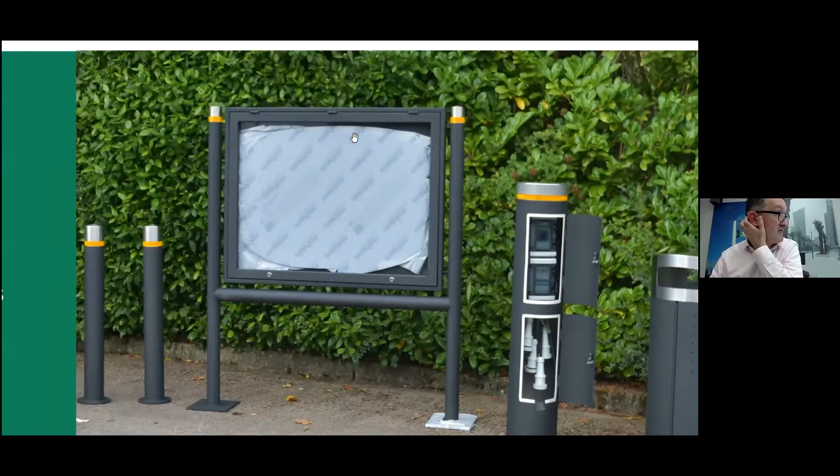There's that metallic black again in a suite of things - power bollards, bins to match with a two-tone finish, black body and stainless top. The caps of these are made to match the notice boards too. They really liked the Lewis notice boards, and they said, that looks great, can you take the Lewis notice boards and coat it to look like the rest of our project? And then some two-tone bollards.